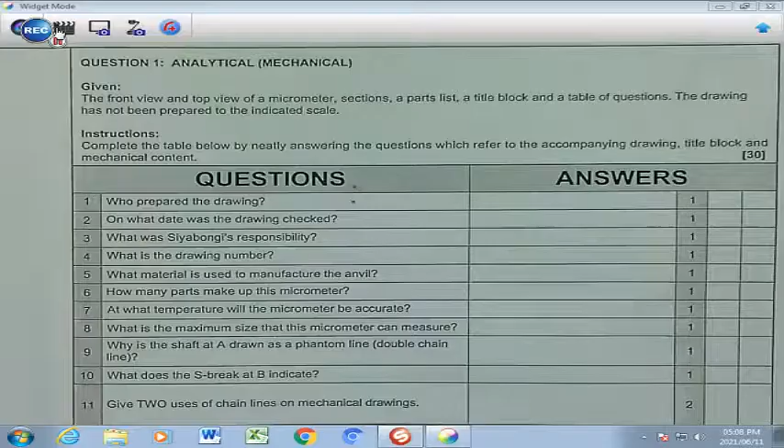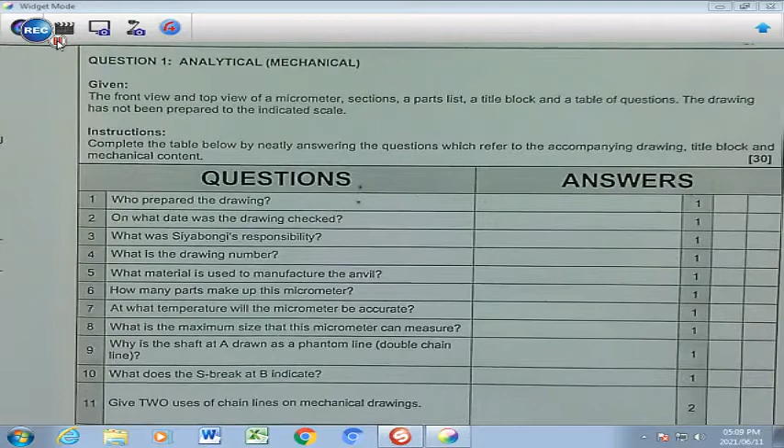Grade 12s, this is Analytical Mechanical 4. We have a front view and top view of a micrometer, sections, a part list, a title block and a table of questions. The drawing has not been prepared to the indicated scale. You have to look at all the questions from 1 to number 20 and retrieve the answers from the accompanying drawing on your left hand side.

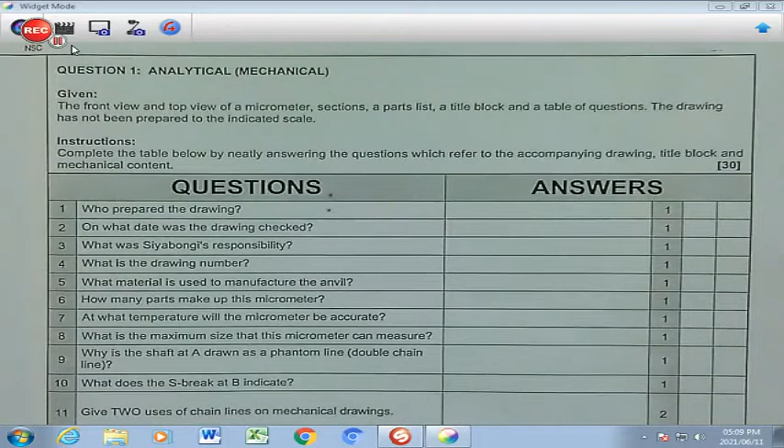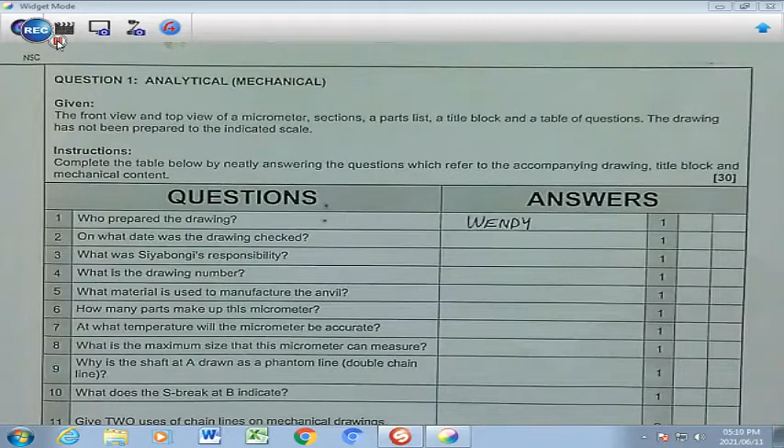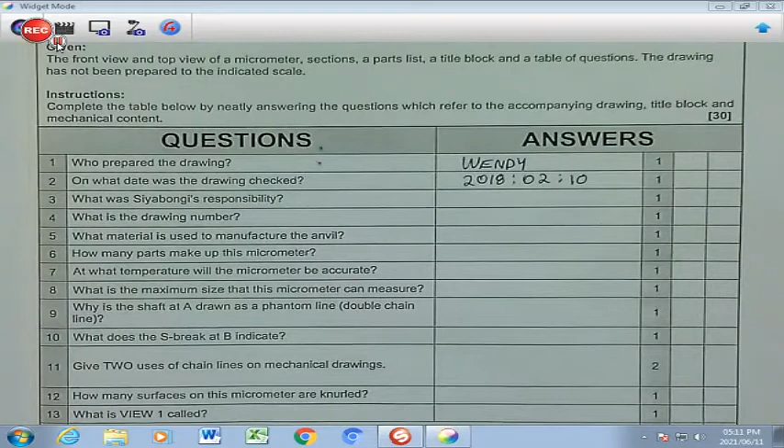Let's start with question number 1. Who prepared the drawing? And that would be Wendy, who drew it right here at the bottom. Question 2. On what date was the drawing checked? The date was the 10th of the second month, which is February 2018. What was Siyabongi's responsibility? Siyabongi approved the drawing, and that was the date.

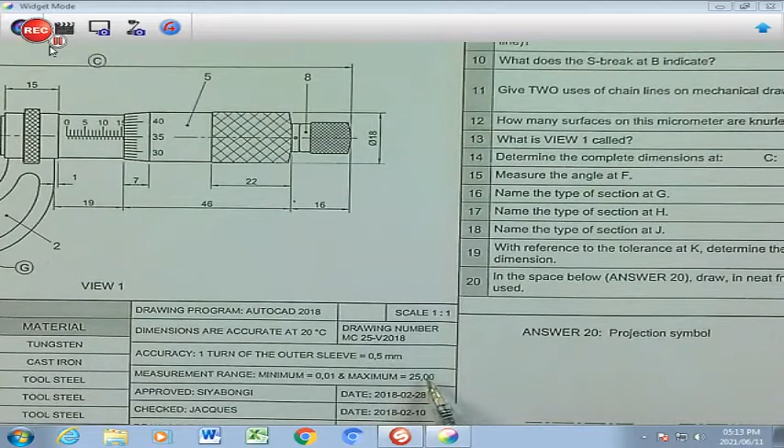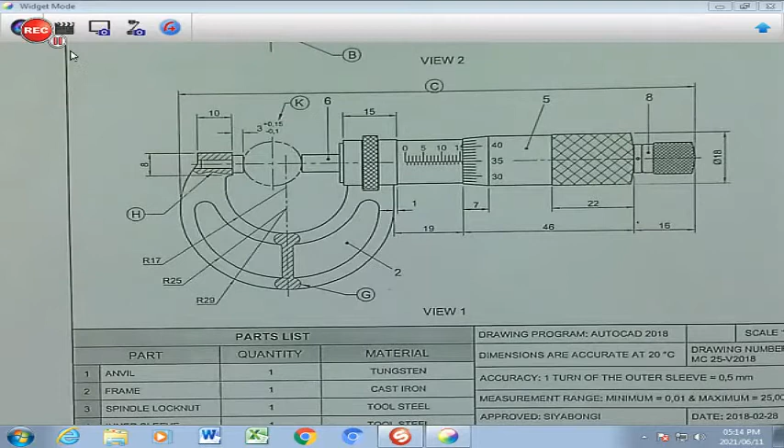Number 4, what is the drawing number? Drawing number MC25-V 2018. Question number 5. What material is used to manufacture the anvil? So that material, according to our part list, is tungsten. How many parts make up the micrometer? Once again, according to our part list, there are 8 different parts which would be assembled to make up the micrometer.

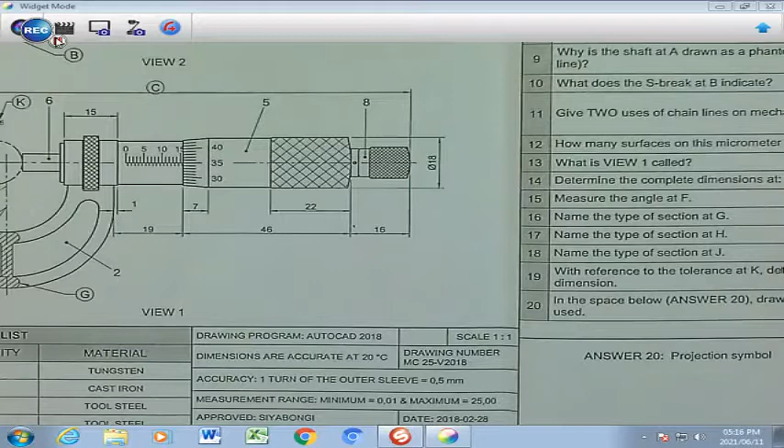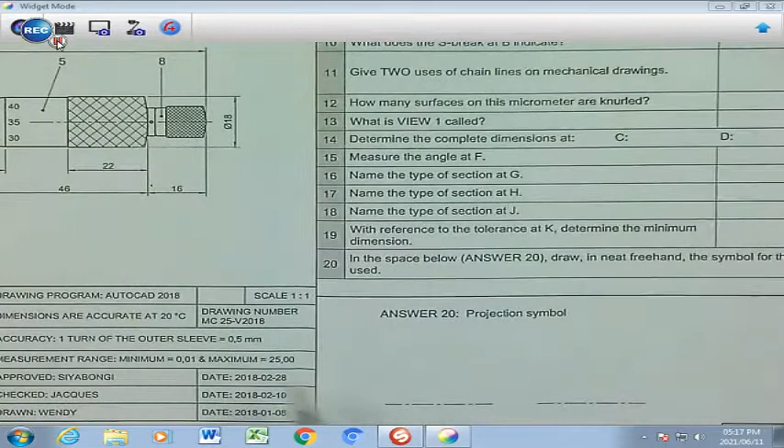Number 7, at what temperature will the micrometer be accurate? Learners, the accuracy of the micrometer will be at 20 degrees, and that's in your title bar. Question number 8, what is the maximum size that this micrometer can measure? So the maximum is indicated here with the measurement range, and the minimum is 0,01 and the maximum is 25,00. So that would be 25.

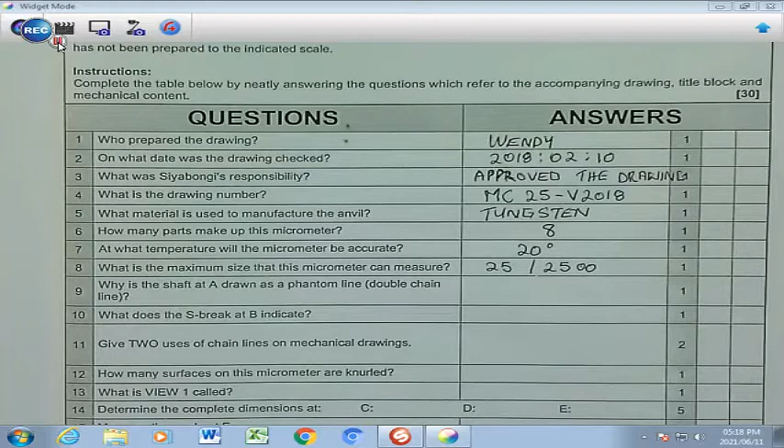Number 9, why is the shaft at A drawn as a phantom line, a double chain line basically? A phantom line is an imaginary line. So we're looking specifically at this component, which is seen from the top, and this is the front. Basically, it's a component that's not really there. So it's just representing the component that's not really there.

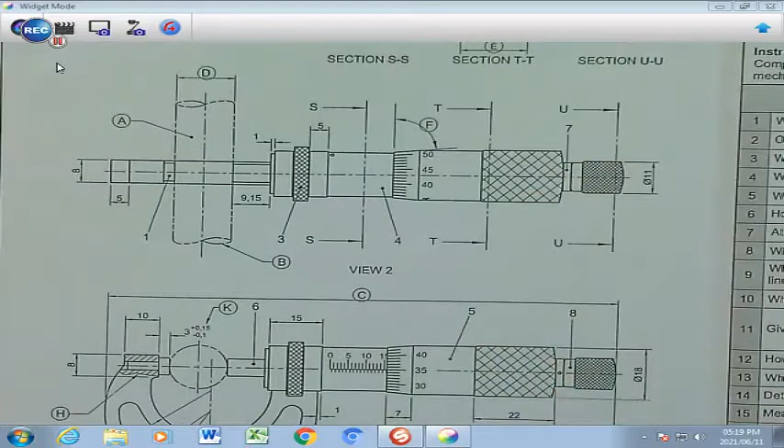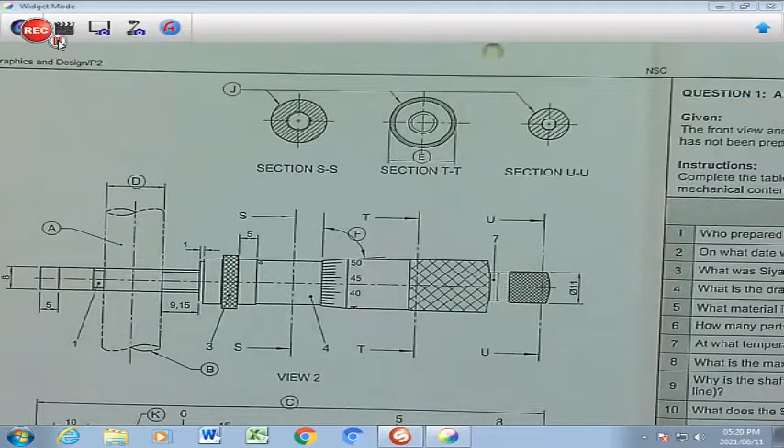Question number 10, what does the S break at B indicate? This is the S break here, and that's also a representation of the S break. It means that that shaft actually continues both to the left and right, and it's longer than the required shape that's drawn on the page.

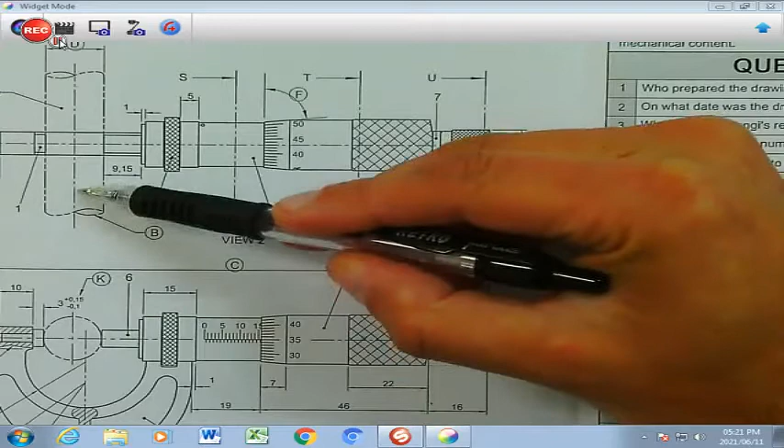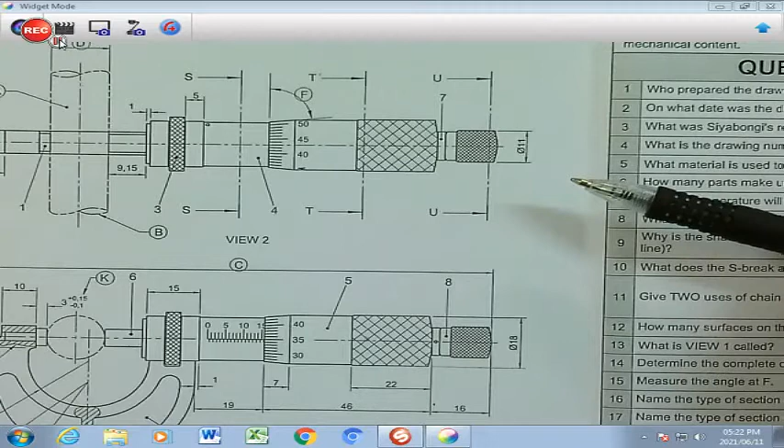Question number 11, give 2 uses of chain lines on mechanical drawings. Learners, chain lines are lines that have a long, short feature, and we have a number of chain lines on our drawing representing different things. So it could either be the center of circles or arcs, or it can be shafts, the center of a shaft which we have here, or it can show symmetry where the one side is exactly mirror imaged as the other side. It can also be PCD, position, or simply a cutting line which you have here, but then it will have arrows both at the one side and the other side.

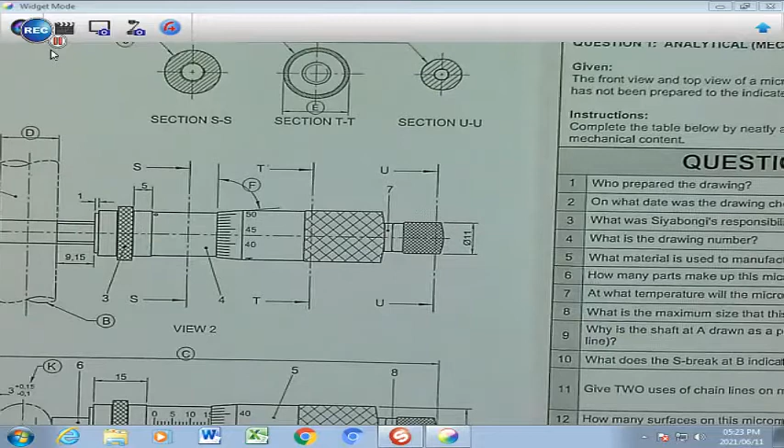Number 12, how many surfaces of this micrometer are knurled? So if you examine the micrometer, you will find these are knurlings which we have here. So one knurling, another diamond knurling, and a third one. So that would be 3 knurlings that you will find on this micrometer.

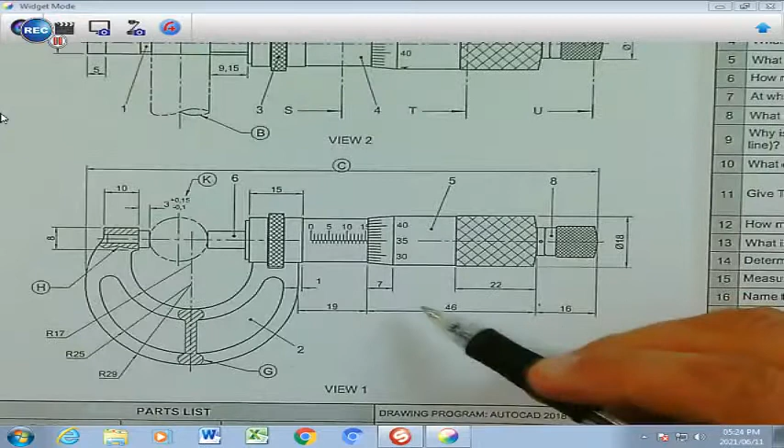Question number 13. What is view 1 called? View 1 is that view over there. This is the front view. Because the drawings are in third angle orthographic projection, view 2 will be your top view of this front view. So view 1 is your front view.

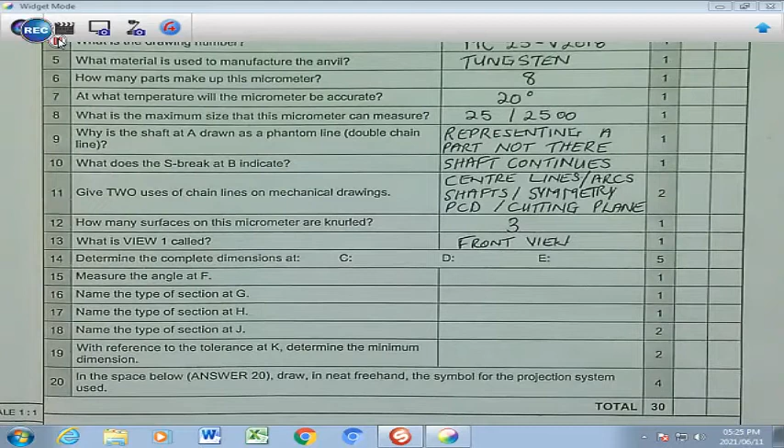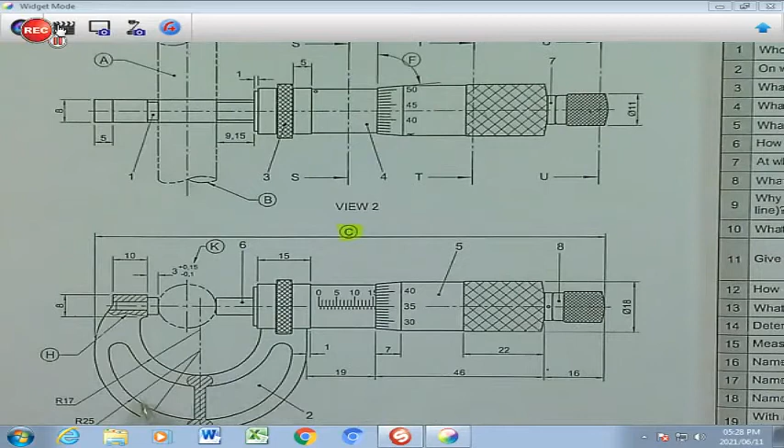Number 14, we need to determine the complete dimensions at C, D and E. Let's go find C, D and E and fill in the dimensions. Learners, if you look at C, it refers to the dimension from the one side to the other side of your micrometer. And you have the sub dimensions here. So you're going to add 16 plus 46 plus 19. And then you're going to look at this radius here, which is the far side.

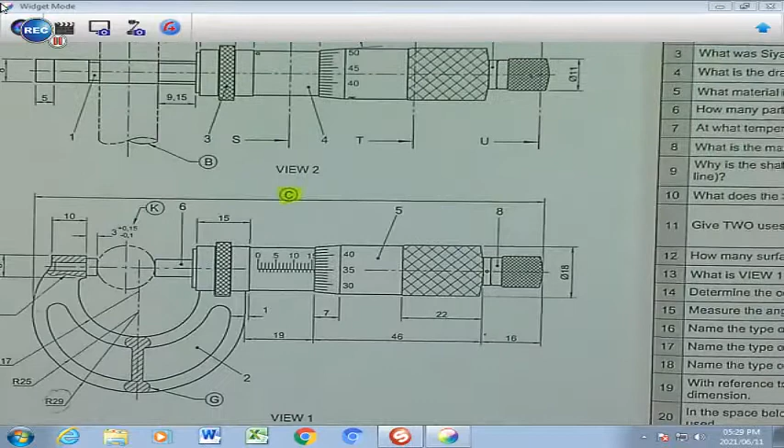And I'm referring to this radius here on this side. And that radius is going to be 29. But this is the radius, so it's from here to there. So we have two 29s there, plus the 19, plus the 46 and the 16 will give you 139. And that we're going to write in by C, 139. And then we look at D.

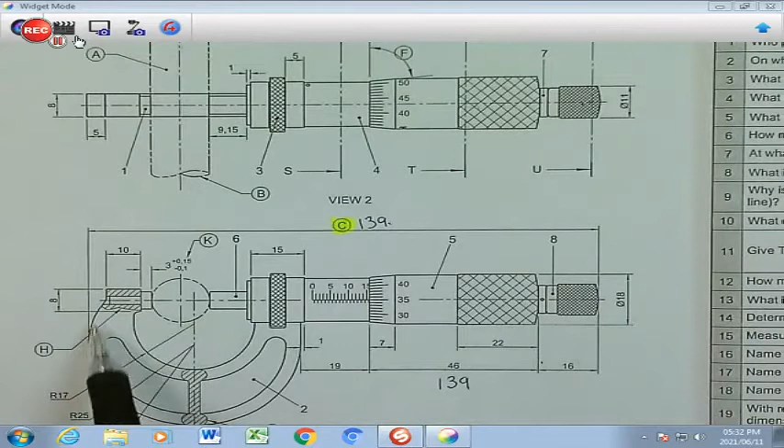So grade 12, you look at D. D is a little bit complicated. So what you need to do is you need to find the distance from here to there, which is going to be 29 this side and 29 that side. And that is going to give you 58.

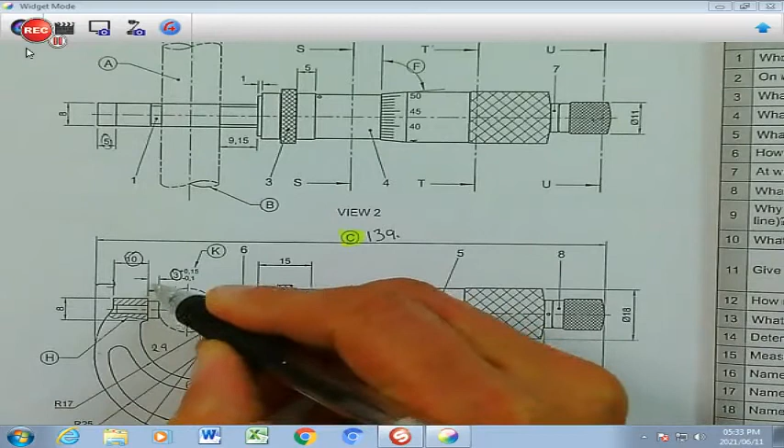Then you need to subtract this amount here, which is going to be 5. You need to subtract this amount here, which is going to be 10. You need to subtract that amount there, which is going to be 3. So we have that point over there. And then you also need to subtract this 15 over here. And you need to subtract that 9.15 that you have there.

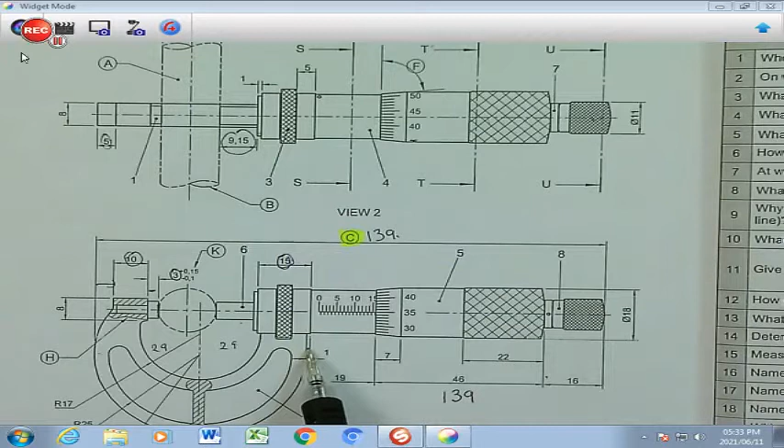The 1 millimeter that you see here makes up for the 1 millimeter that you see here, which basically cancels out. And altogether, you're going to find an answer of 15,85. So that here is going to be 15,85.

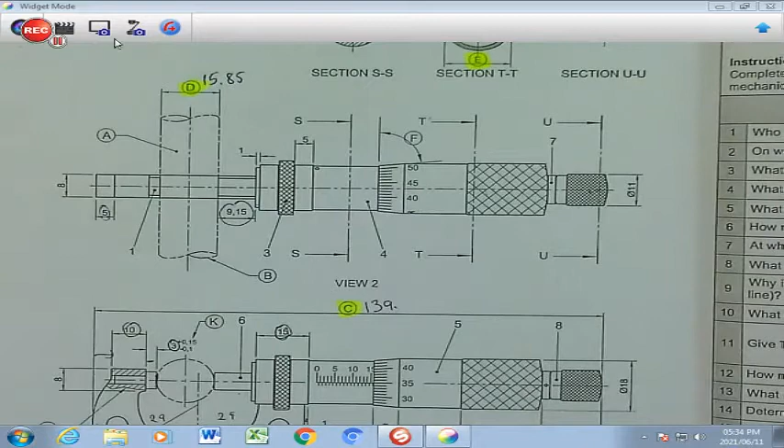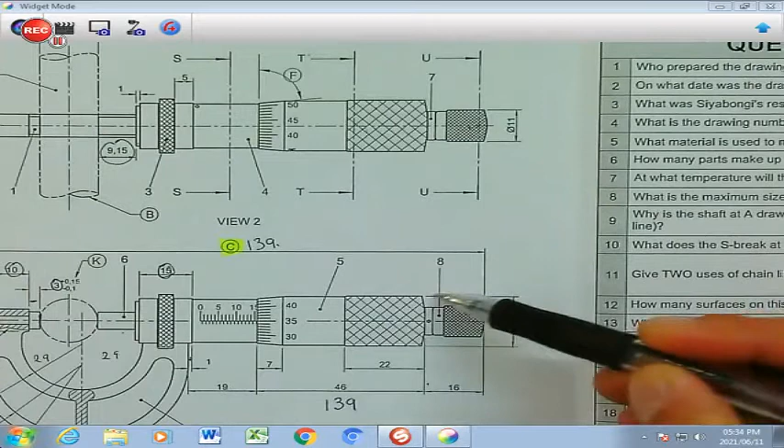Now, if you look at E, E wants the diameter of that part there. That part there is section TT, which is that cut section here. There's no dimension given here, but if you go to your front view, you're going to find that that diameter 18 refers to that piece of cut section through this knurling here. So your answer is going to be diameter 18 for E.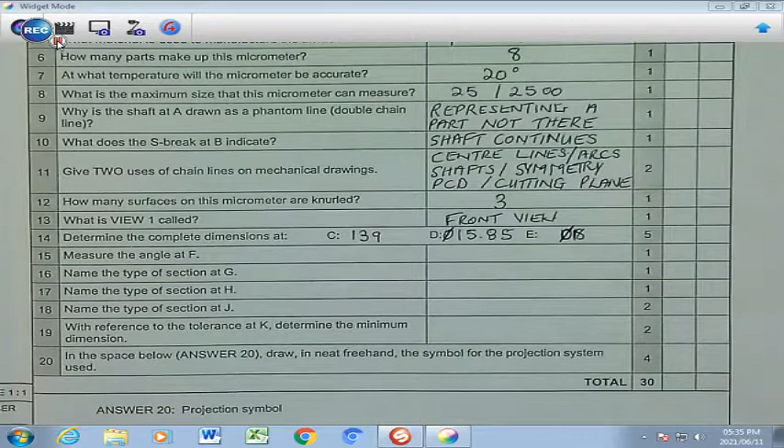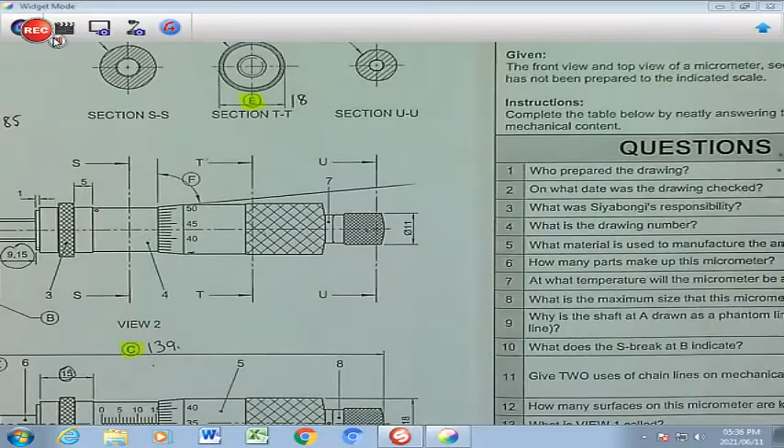Question number 15, measure the angle at F. So we're going to look at this angle that you will see here. So you perhaps will have to extend that line there to get a perfect angle or an accurate angle dimension. And you're going to make use of a protractor, which we have here. So you are going to place your protractor perfectly on that point there where the two lines meet.

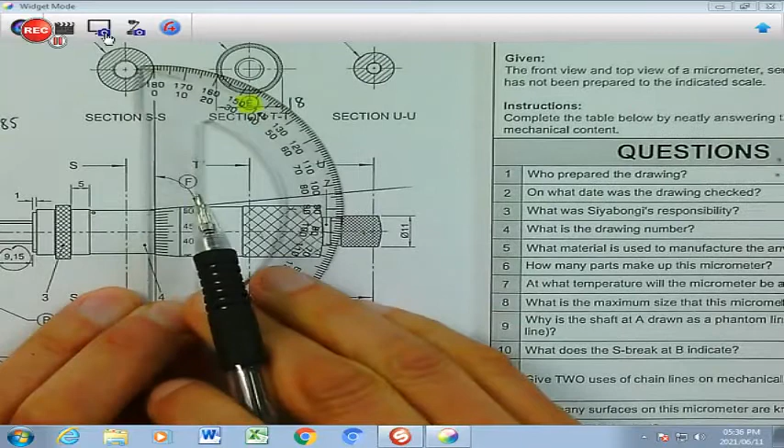And you're going to line this bottom of your protractor up with that line, and you're going to see where this line strikes. And you will find it strikes perfectly through 84. So that is going to be an 84 degrees that you will see there.

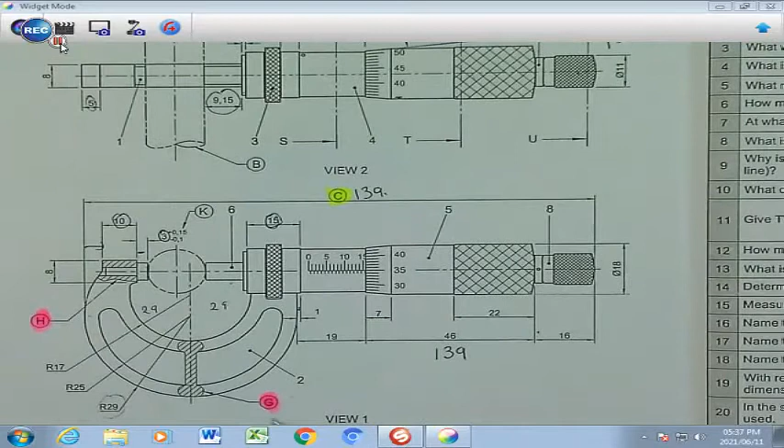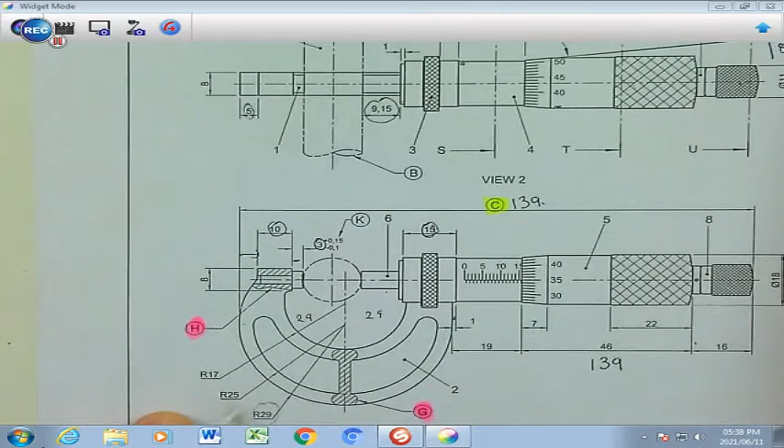We're looking at number 16, number 17 and number 18. Name the types of section at G, H and J. So if you look at G, you will find that the shape of the sectioning lies inside the component. So that makes that a revolved section. If you look at the next one, which is going to be H, H has a wavy line there, so that is going to be part section, because the wavy line is normally associated with a part section, and the part that we need to show would be that part there.

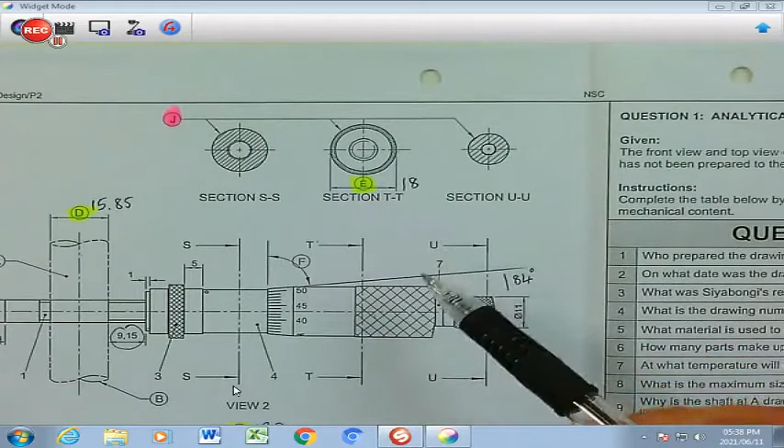And then J refers to these three components which were taken out, so it can either serve as a removed section or a successive section where it is successively cut, S, T and U. Both answers will suffice.

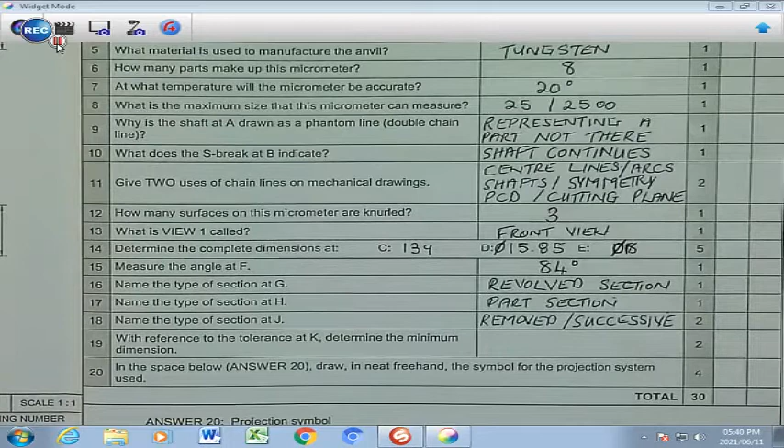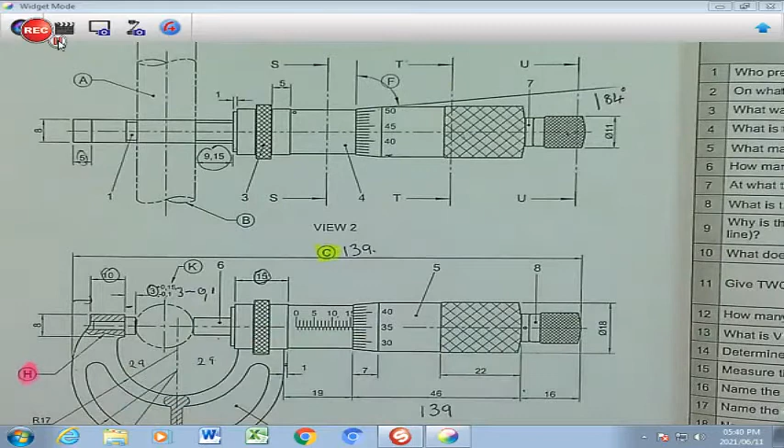Number 19, with reference to the tolerance at K, and we need to find K on the drawing, determine the minimum dimension. Let's go find K. So K refers to the 3, and we have the upper and the lower tolerance here. So we want the minimum, which is the lower tolerance. So we are going to say 3 minus 0,1, and that's going to give us an answer of 2.9 millimeters. You're going to write the answer in the answer block.

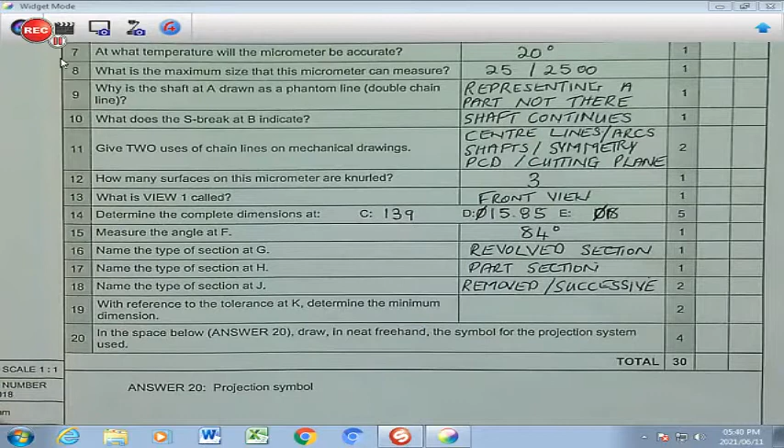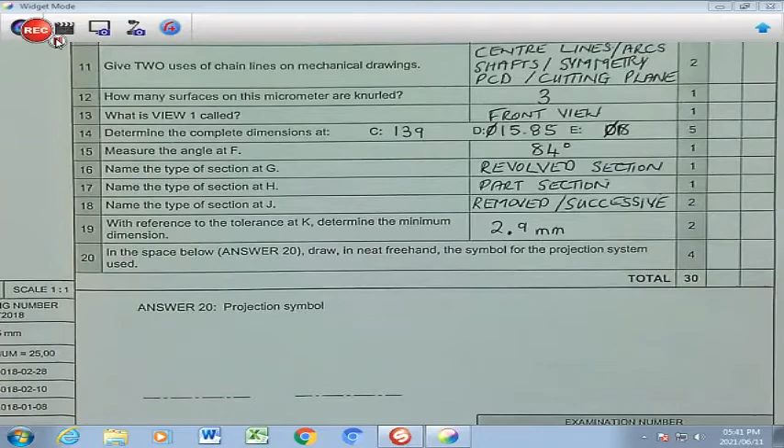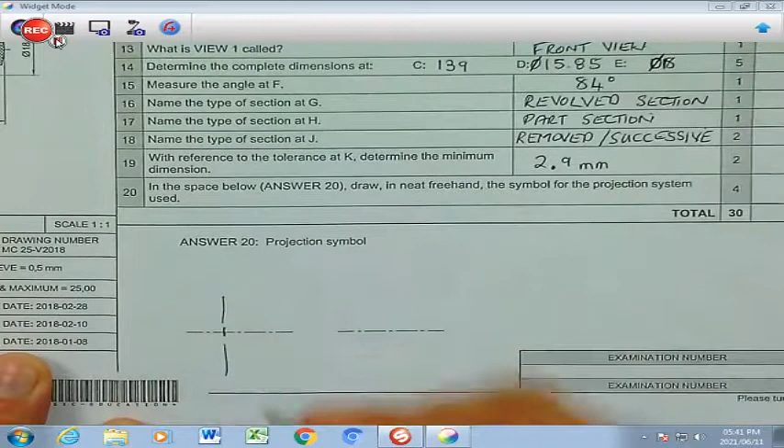Question number 20, and the final question. In the space provided here, draw in freehand the symbol for the projection system which was used. Learners, this is a very popular question, and we're going to have our crossing and our center line firstly, small circle, big circle, representation of the small circle, representation of the big circle, and the adjoining lines that you will have on a slant, which forms your third angle orthographic projection symbol.

Learners, thanks so much. This concludes the analytical mechanical chapter.